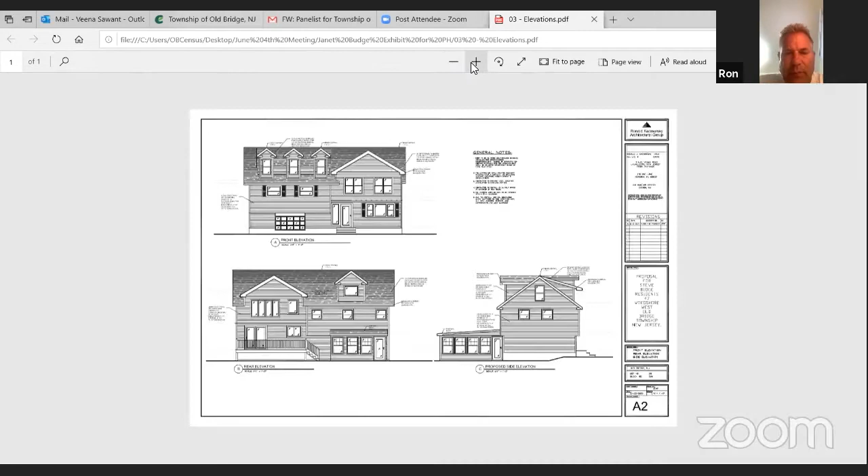Okay, so I see on my illustration, I'm seeing the plans. I don't understand exactly what was in question, and speaking to her in a limited way, I guess it's the attic area. There are two areas that are unfinished attic areas, and they are going to be for storage, listed as such on the plans in two distinct floor areas listed as storage. I believe that's what was in question. So if there are any questions related to that issue.

Okay, I think the planner did have some questions, because I believe there was some setbacks that were in question. And I think there was a question of the total square footage, either of the property or the house. I'm going to go to Mr. Warren.

So the real issue was that your plans had indicated that the space above the living area is also an attic. The zoning officer and myself determined that there is a height of 9 feet at the corner where the roof meets the wall, so there's enough headroom there. Typically, when it's an attic, it would be 5 feet or less. With 9 feet of room, and windows on it for that area, we would consider that an additional room, and it should be included in the floor area calculations.

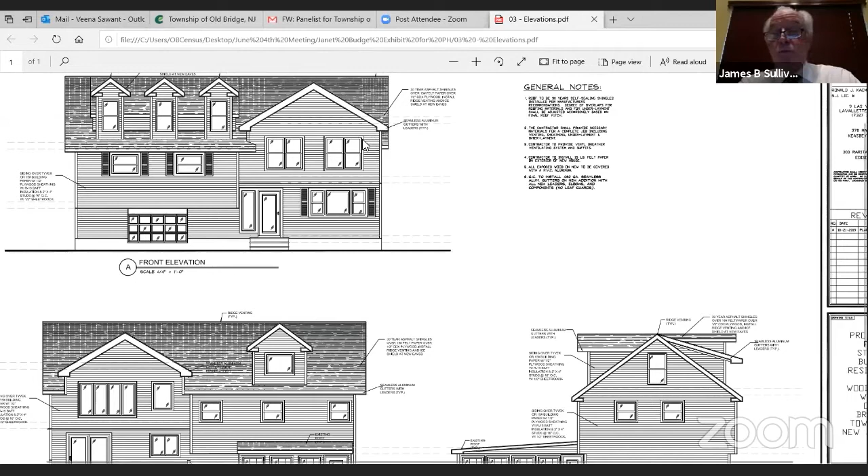Well, the real question is that if it was a storage area, it has windows, it has a headroom of 9 feet. And what happens is, yes, you probably may not use that space for living purposes and you use it for storage. But when you sell the house, how do we as the town monitor whether somebody is using that space as a room or not?

Well, this is Ron, the architect. If I can jump in, with the design of the addition and with the curb appeal in mind, creating that additional space and creating the dormers, having that large area without windows, without any roofline modifications, wouldn't be as appealing for the house.

But if I'm understanding what you're saying, it may make sense since it's there and we have the design with the roof lines and the windows, and we're before the board for that consideration of a small additional area. It may behoove the owner to request the variance for that square footage, understanding that they in the future may have the ability to utilize that space as living space, and certainly have the advantage of selling the house, realizing additional living square footage. Yeah, Mr. Kazmarski, I agree with you 100%.

Certainly, I think the property owner would want to maximize the usable space on this property. It would certainly make it more appealing for purposes of resale. So, Mrs. Budge, I think you probably don't want it to be a condition of approval that that area cannot be habitable, as long as we delineate that that one area will be habitable.

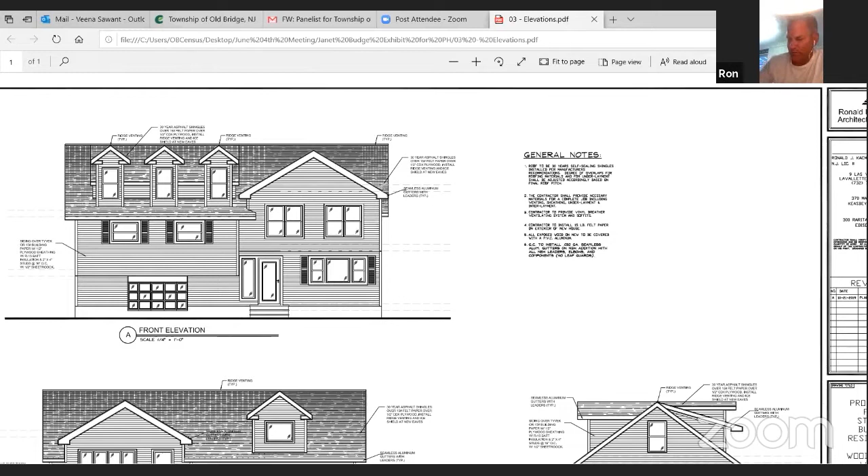Based on your offhand calculation—I'm sorry, do you know offhand what the FAR would be? It is 0.40. Yes, 0.40? Yep. Okay, fine, exactly.

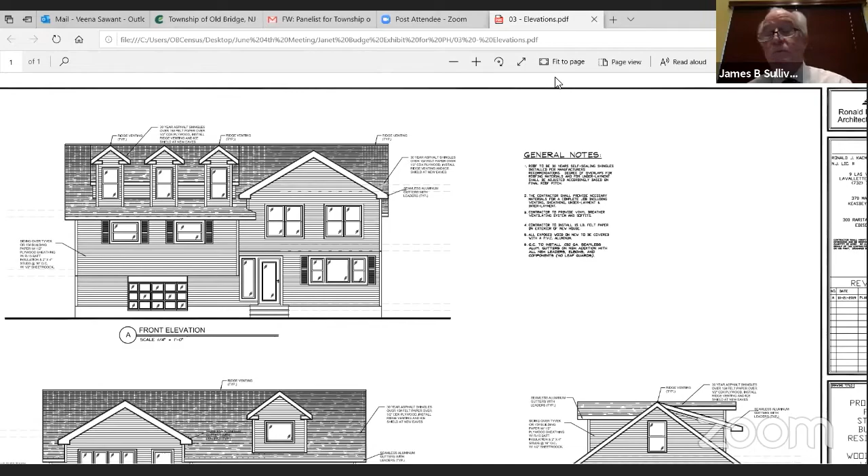Ms. Budge, I think these matters occasionally do come before the board, either from homeowner confusion or other intent, and they kind of come to seek forgiveness rather than ask permission. And in this case, this isn't your home, but I know it was your brother's and your sister-in-law's present home. Probably with a little bit of intentions, they wanted to expand room in there, but just didn't do it in the right way.

It probably would not be in your best interest, as you've been told by the professionals. If your sister-in-law wants to sell that house, no one's going to buy it knowing that you can't make it a livable space. I understand that having it available as living space would be more beneficial, but the board will make that decision whether to approve it or not. For you to lock yourself in and not get a fair shot, no one's going to buy that house. You've heard that from the board attorney as well, who doesn't have to give you that advice. I appreciate it, as well as from Ms. Salone.

Mr. Sachs asked if anything further was needed on the record. He noted a question in paragraph 4 about the height of the proposed structure, and asked Mr. Kazmarski to confirm. Kazmarski explained the overall height was not modified: the existing height was 26 feet, the proposed is 26 feet. Although the roof lines were modified to realize more space inside the roof line, the ridge remains consistent, so there's no height modification.

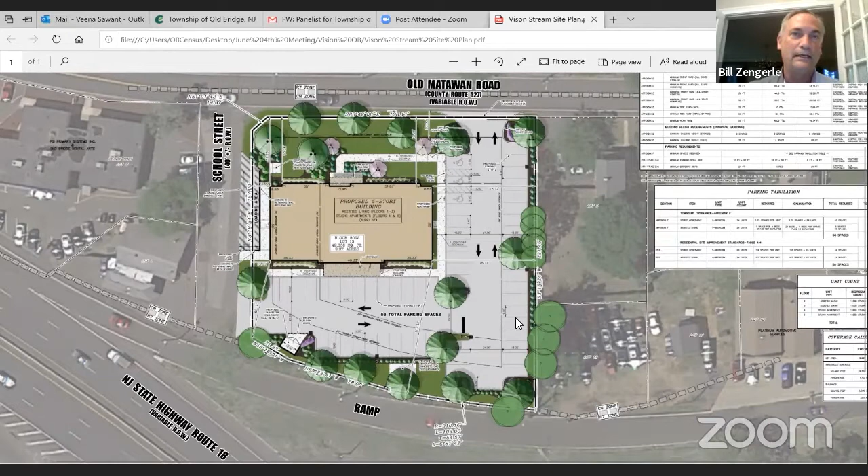The basics of how they differ in physical plant: one obvious difference, if you've been to visit a loved one or happen to have gone to a rehab facility for yourself, is that they look more institutional. They're set up for that type of care.

And you're usually sharing a room. An assisted living looks more like an upscale apartment community. The residents in an assisted living usually have their own apartment or suite. In our facility, we're talking all studios, and we had talked about the size of the studios before.

As far as the needs in the area, the Department of Health lists on their website all licensed facilities who are licensed under the Department of Health. In assisted living, there are, in the whole county, 11. Within Old Bridge, there's only one, attached to the Reformed Church. There are 4 nursing facilities in Old Bridge proper. In the county, there's 27 total nursing homes, and there are 11 assisted living facilities in the whole county.

That ranges all the way up to Edison, and they range in size from 42 beds to 156. So our proposal is certainly much smaller.

When you look at the demographics of the county, we have about 840,000 people in the total county. Old Bridge has about 65,000, and 11% are 70 years or older. That's 93,000 people in Middlesex County who are 70 or over. And when you go down to 60 or over, there's 124,000 people. We're looking to accommodate 50, so there's a little bit of room in there.

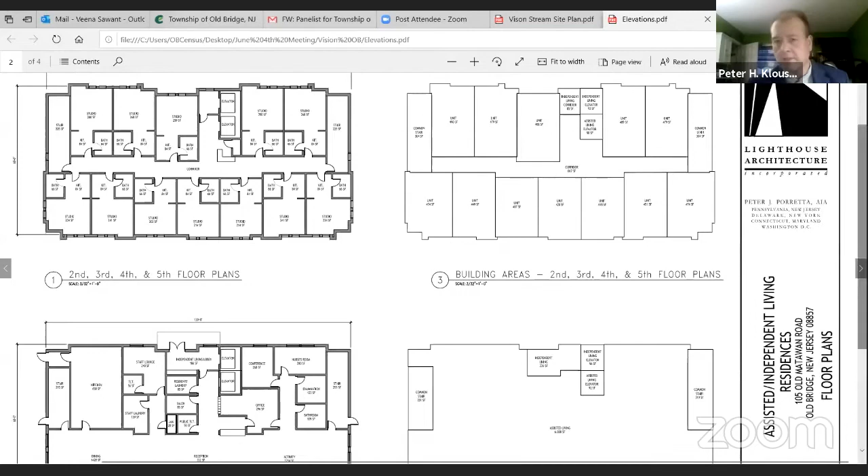But I did want you to share with the board a little bit about that. That ground floor is not a wide open space — there'll be some amenities in there, and it allows flexibility to create seating areas, eating areas, exercise, entertainment, and certainly the kitchen down there. So would you describe that a little bit like you've done for me?

Sure, if you could zoom in on the lower left a little bit — it has more of the, correct, right there, which has the office details also. If you look across the front, or the lowest part of the building, you have dining, reception, and activity. It's a free-flowing space, but the furniture arrangement basically outlines the usage of the space. We have a reception desk straight across from the front entrance, and behind that, straight down that short hallway, are the elevators up to the floors. The main area we're talking about is activity areas; the other areas are support areas.

Over on the right-hand side it says activity — in essence that's a living room, a large living room open to reception. The furniture layout will be such that during the day, for example, if we bring in an entertainer, the bottom right-hand corner will generally be a somewhat open area where a leader might be for exercises and things like that. Right by there will be a piano, useful throughout the day, since music plays a heavy part of our whole activity program, as well as couches, chairs, and tables, as you'd have in a hotel lobby.

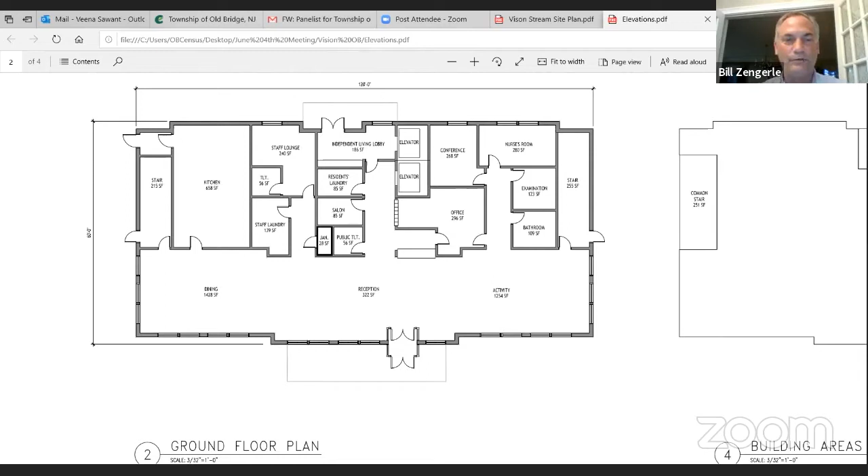Thank you, Bill. Thanks for that clarification. Mr. Chairman, I don't have any more questions for Bill. Our next witness is the architect, but if there are any questions that the board or your professionals have on those follow-ups, now's the time.

You're muted, Mr. Chair. Follow my own rules. I will ask the professionals. I'll start with Ms. Sawant, do you have any questions? I didn't hear her. I don't have any questions at this time.

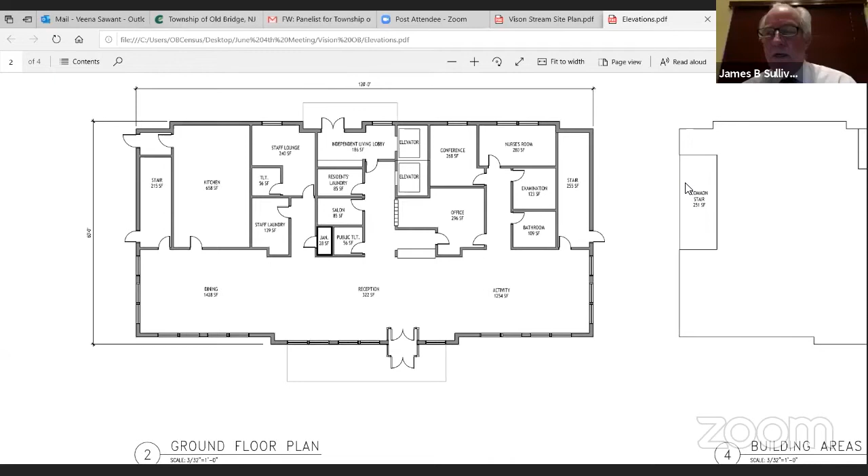Okay, is Ms. Shapiro on this? Yes, I don't have any questions at this time. Okay, and maybe just the fire marshal, you're here, right, Tom? Jim, I have no questions. Okay, how about the board members? Any of the board members have anything right now for Mr. Zengerle? I can't see them on the whole screen because I have the plan in front of me, but I'm assuming not. We can always save it for later.

Mr. Clauser, why don't you continue? Certainly. Thank you, Bill. I think you could mute yourself for the time being, and Peter, if you could join us. I would ask if maybe Mr. Porretta, the architect responsible for designing these plans, could be sworn, and we'll get his credentials on the record and hopefully get him accepted as a professional.

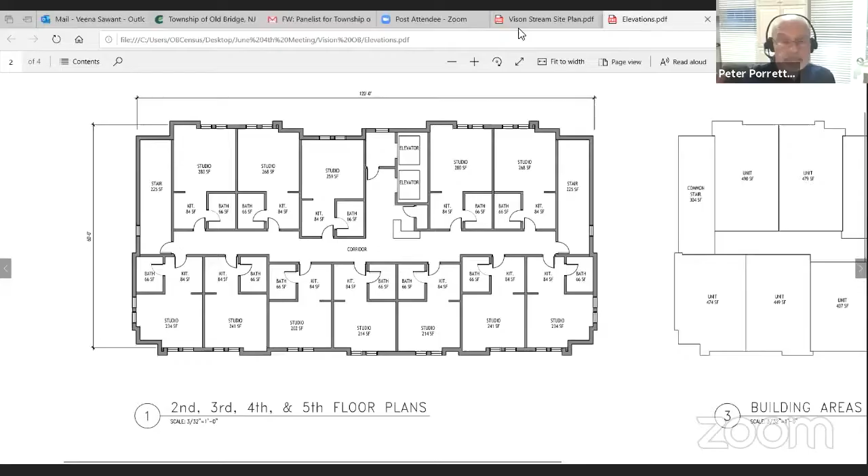Sure. Mr. Porretta, if you can please raise your right hand. Swear to tell the truth, the whole truth, nothing but the truth, so help you God. I do. Please state your name, spelling your last name, and professional affiliation for the record. Peter Porretta, P-O-R-R-E-T-T-A, licensed architect, state of New Jersey, as well as other states. Thank you, if you could just share with the board a little bit about your professional affiliation, that you've testified in front of other boards before.

Just want to give the board a sense of your qualifications. I've been practicing architecture for 31 years as a self-employed professional. I'm licensed in several states, all the mid-Atlantic states from Connecticut through Virginia, and the state of Florida. I reside in Atlantic County, New Jersey. My office is across the river in Philadelphia.

Mr. Porretta, you've testified before planning and zoning boards before, I'm sure. I have. Okay, we'll accept his expertise, Mr. Clauser. Thank you, Mr. Chair.

We have here the architectural plans that were submitted to the board as part of the application. I don't believe they've been altered in any way for the presentation, is that correct? Yes. So Larry, I don't know if we mark them or just leave them alone, since they're part of the submission. We don't have to mark them, it's part of the submission. Mr. Porretta, when you testify, just indicate what sheet you may be referring to in your testimony.

Okay, I could speak from whatever sheet or order you'd like me to. So whatever sheet you have up, in whatever order, I think we could finish with the rendering and walk through the functioning of the plans and the other 2D drawings, and finish with the color drawing if you'd like. Sure, I think that's an excellent plan. You want to take us through the floor plans first? Is that what you need to do? Sure. Okay.

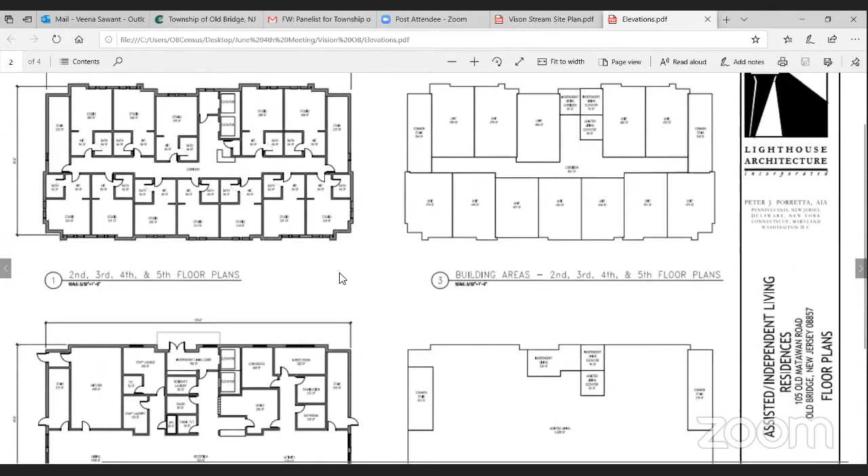Okay, you'd have to zoom in if you can. I'm not as young as I used to be. My eyes don't work as well as they did.

Okay, as you know, this is a 5-story building with a basement. The first 3 floors is a New Jersey Department of Health licensed facility, so we will have to submit to the New Jersey Department of Health and obtain their permission.

There's a stair on either end. There's elevators in the middle. One elevator is for the top 2 floors of the independent living, and the other elevator is for the lower 3 floors. Both elevators are planned to do 6 stops, all 5 floors plus the basement. They are located this way so that if one elevator is down, the whole building can share the other one, so they're not restricted to the stairs. However, in normal operation, one will be for the state licensed facility and the other will be for the independent living apartments.

The plan follows the program of the operator as well as the New Jersey Department of Health requirements for an assisted living facility. There are requirements for so many square feet per person for activity and living space, and so many for dining, as well as so many square feet per person for residents. There's requirements for nursing, examination, staff lounge, and the other spaces that you see here.

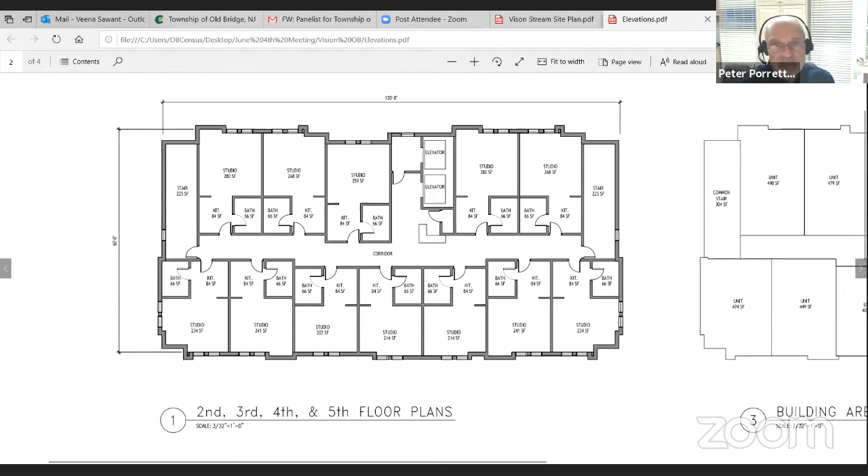Here's the elevations. The building will have on the lower 2 floors a brick veneer, the upper 3 floors a panelized rain screen with at this point 3 different materials selected to bring some variety into the facade. We do have some cantilever canopies at the 2 entrances.

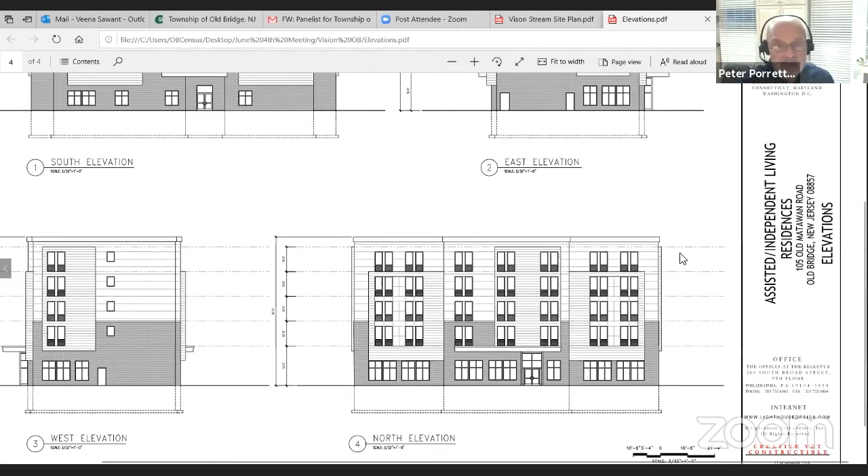You could see the adequate fenestration where there'll be bright daylight in the lower common areas, as well as each living room has a window, and they'll be set up like a hotel room with a mechanical unit under the window.

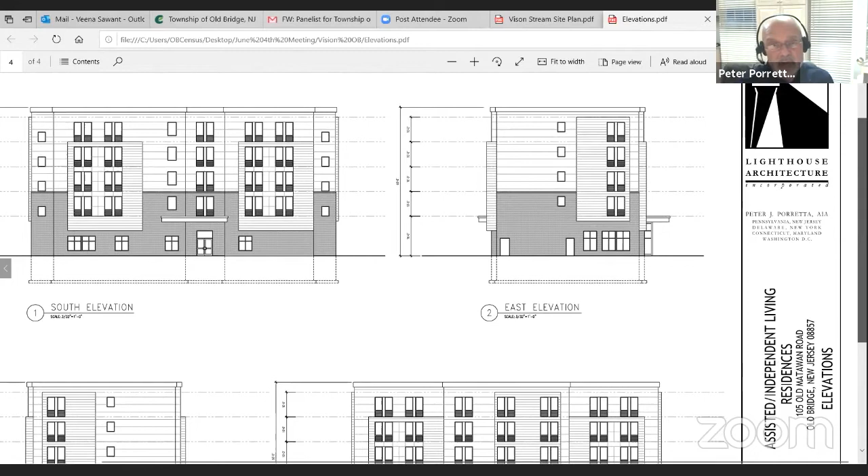And we have our floor to floor heights. I have consulted with a mechanical engineering firm who specializes in hotels so that we're making every effort to minimize the height of the facility, however provide adequate ceiling height in all the interior spaces. So we are cognizant of the overall building height and working judiciously to keep it as tight as possible.

That was actually a consideration - you worked with a mechanical engineer in order to get the space between each floor as small as it can be. That was a consideration. You were directed by the applicant to do that. That was something that you considered and you did.

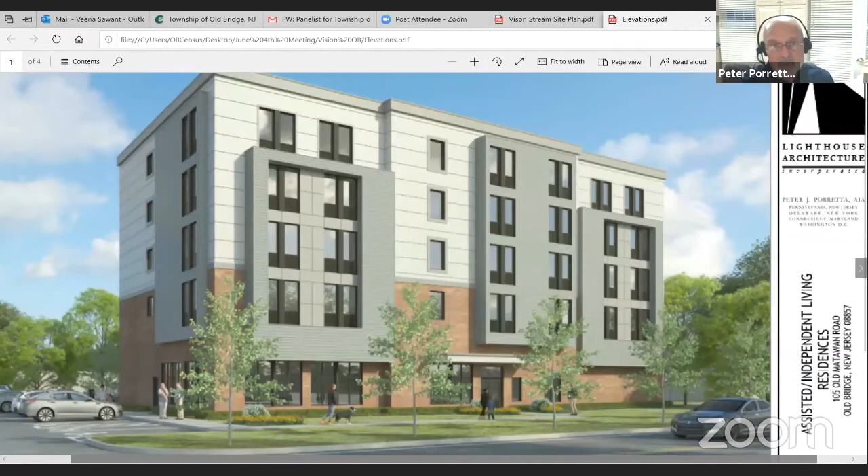And even the structural system that we're planning minimizes, utilizing a system that minimizes the floor deck height so that we can keep the building as low as possible. So structurally and mechanically, we are working to keep the building as low as possible.

Then you've also created this rendering here, providing some visual aspect of the design of the building to be attractive. And I would imagine that although in your opinion, as you designed it, it's attractive, you'd be welcome to any comments from the board's planner or engineer. I would think that you could work with the styles, the exterior, if they had some input.

Absolutely. Color is the first draft on color, first draft on materials. This will all evolve through the design process, as well as we added articulation and variety to the facade to make it as attractive as we can.

Thank you. Is there anything else that you'd cover that you want to add? I can't think of anything.

Okay, I just want to ask one question just to clarify. You've had the opportunity to work with Scott in the design of the building and certainly with the fire department, and we're able to make sure that there's a fire department connection and all of the appropriate safety measures are in place and are part of your design.

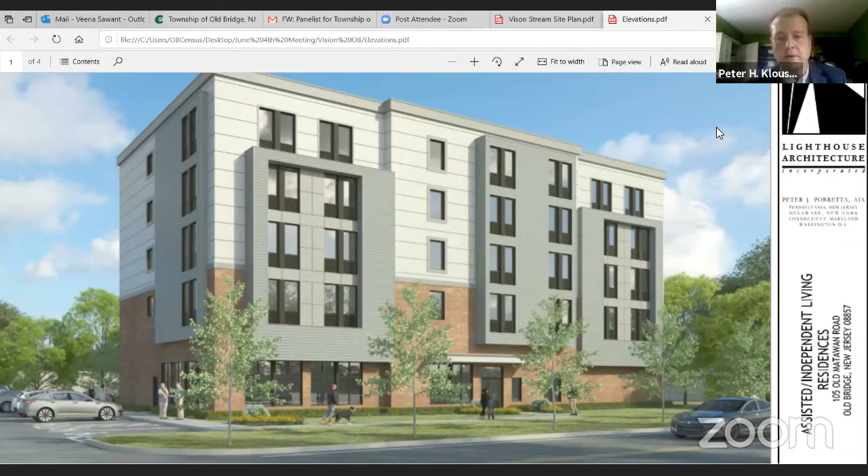Yeah, absolutely. So the lower 3 floors are, as I said, a New Jersey Department of Health licensed healthcare facility, and the upper 2 floors are independent living. We did work with the engineer's office to locate fire department connections and all of the utilities to the building, generators, because there will be a generator for the assisted living facility. It's a requirement. All of those things we worked through with the civil engineering firm.

Great, thank you Mr. Chairman. I have no further questions of Mr. Porretta. He's available to your professionals and the board for any questions you may have.

Muted again, Mr. Chair. There we go. People don't want to hear me talk anyway, Peter. It's the only time I get to tell you something. Yes, thank you, it's fine. Keep muting yourself. Well, you caught me on that one twice now.

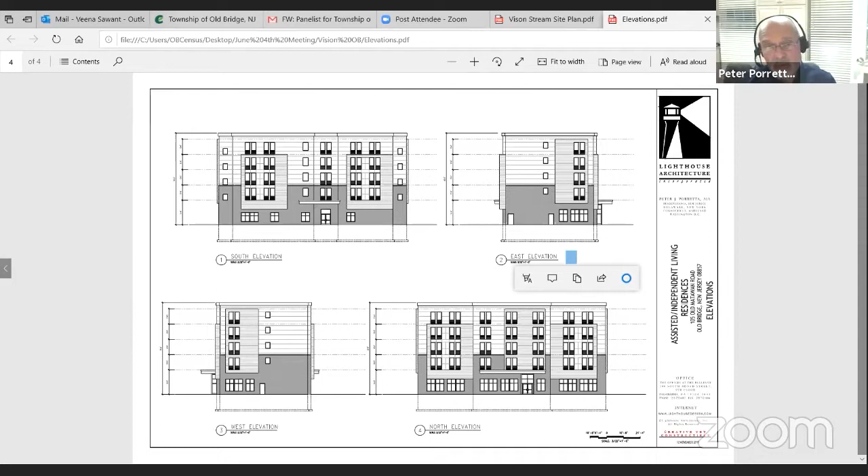My comment was more about the equipment being in the yard, because we've had issues in the past. I just wanted to ensure none of the equipment would be within the yard area. I believe we have space for a generator, which is required, and that would be in the yard, but other than that I don't anticipate any equipment in the yard. Do you know the approximate location? I don't recollect seeing it on the site plan.

Veena, I'm making a note with regard to the equipment. I think we could probably provide some better detail next time and just clean that up. Sure.

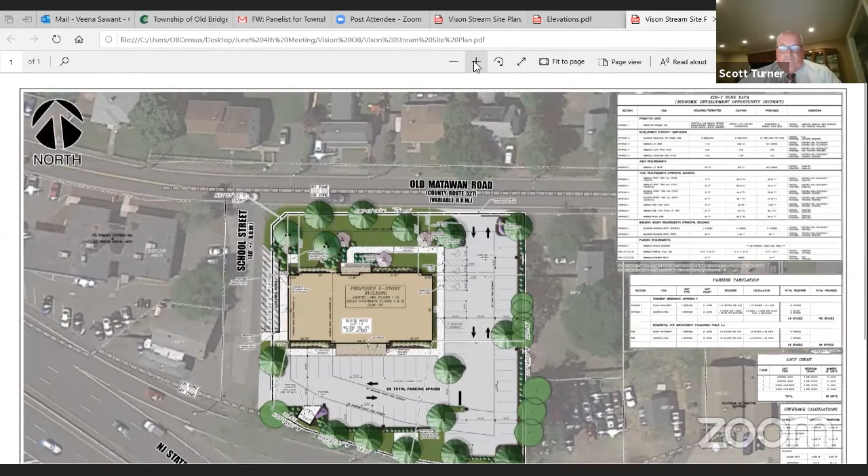Okay, that's understood. Can it be worked out to use bigger than the minimum? I believe the OSHA minimum is 42 inches for fall protection or a railing. We would have to add a rail if we didn't have a 42-inch parapet, yes.

Okay, I just don't want you to go any deeper than that. All right, not a problem. Thank you very much. Thanks, Jim. Thank you, Fire Marshal.

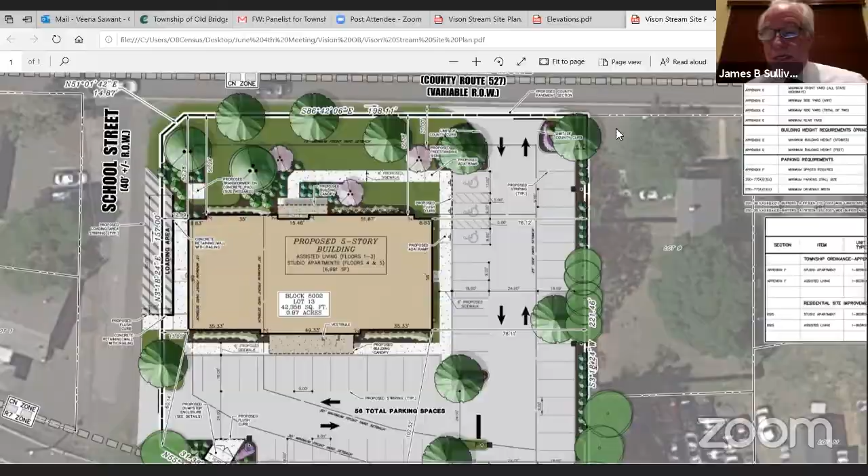I have one question before I ask the rest of the board members. I heard you say something about the two entrances on the ground floor plan, and they're easily distinguishable, one in the rear and one in the front. But I think it's important for those watching at home, and one of the questions was, if you recall, that people were concerned with the independent living residents on the top two floors mixing with, at that time there was no suggestion of an age restriction, that they might be just mixing in a common area. Could you explain that a little bit better for those watching at home?

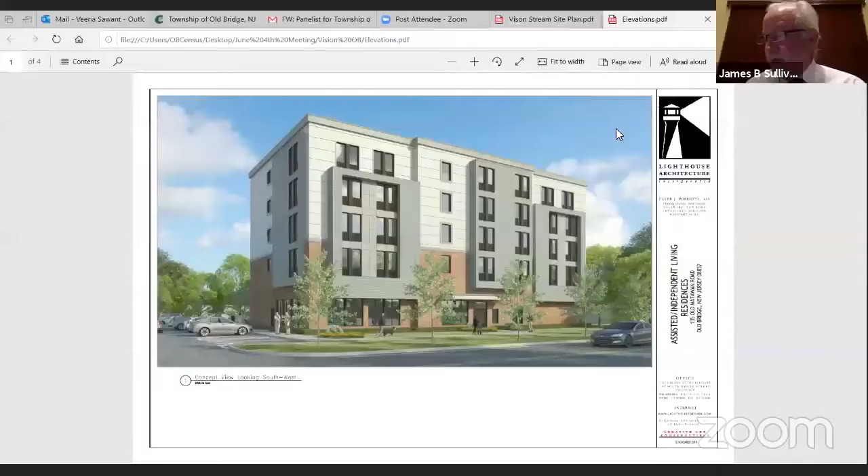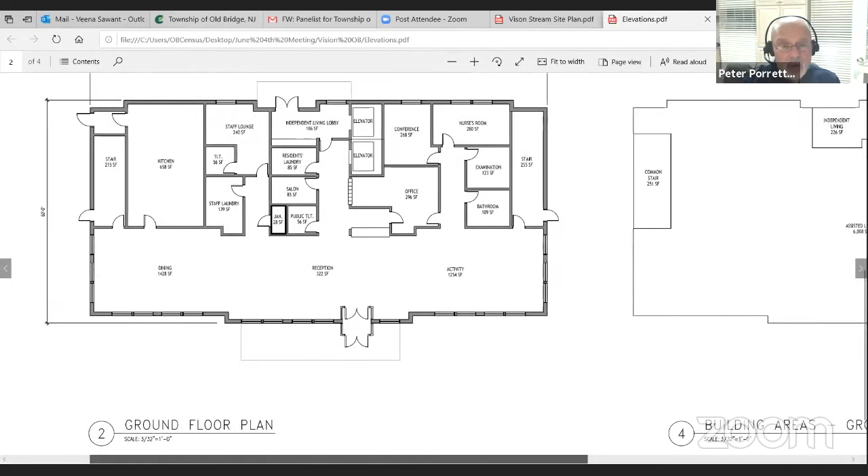If you can go to the floor plan, I could zero in on the lower level floor plan. Yeah, maybe you could take the time so people at home would understand this. Understood, happy to do so. Please zero in on that ground floor plan, make it large enough so that we can all see it. So on the lower part of the plan is the entry vestibule with the canopy. Would you put a cursor on that for those at home? Thank you.

The entry vestibule at the lower end, yes, that is the assisted living entrance. And directly across from that, you'll see a counter—that would be the receptionist for the assisted living, with a door to the office. Now, in the upper part of the plan, you'll see a lobby with a smaller canopy. That is the entrance for the independent living. There'll be mailboxes—you could see the mailboxes on the wall right there—and then the entrance to the elevator. So you can come in, grab your mail, enter the elevator.

Now there is a door between the two that obviously will be locked. If and when one of the elevators is serviced and it's down, building management could make the other elevator available, so no one is locked on a floor without access to an elevator. But through the day-to-day operation, that door will be closed and locked, and the independent living will be completely segregated from the assisted living. This is also looked at by DOH, the New Jersey Department of Health—their architect will look at this arrangement as well.

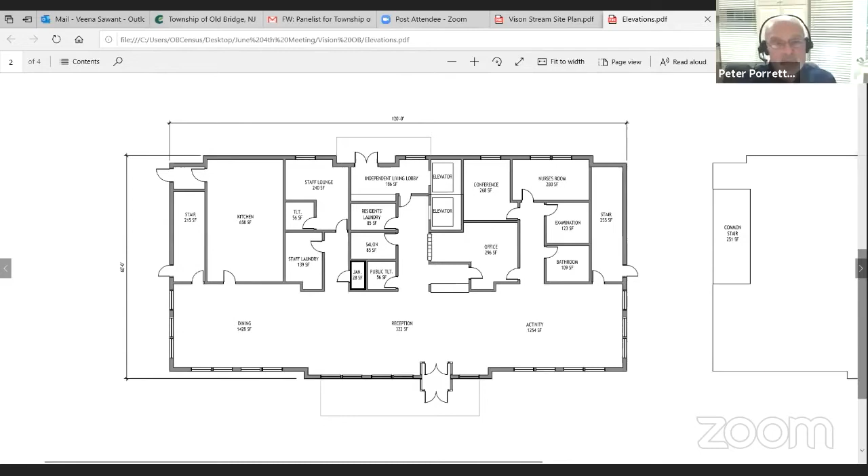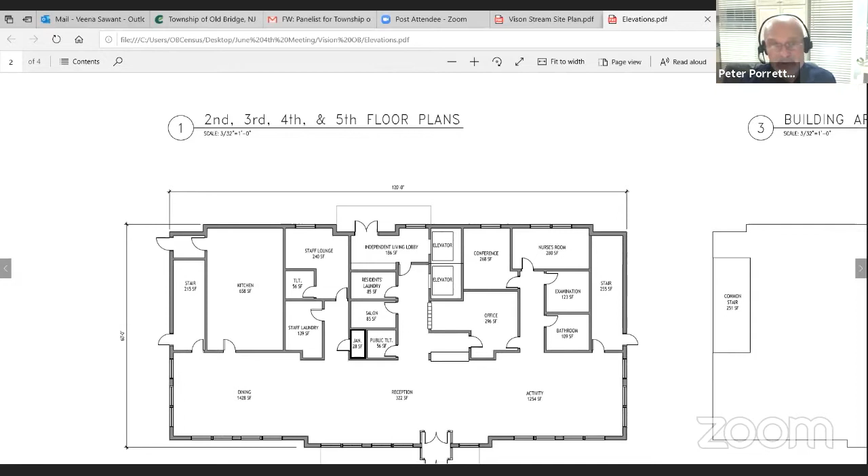Okay, and sir, just for the commenter's explanation, are you saying that no one could come in the back door if you lived upstairs and just walk into the communal area on the first floor? Absolutely, they cannot. And the only time they'd be able to access another elevator is if the other one was out, correct? If one of the elevators is out, building management would have to supervise that while it's being serviced, so that no one is stuck on a floor, because there are walkers and wheelchairs in this facility and they need elevator access—stairs aren't an option for some people. So we are cognizant of that, but the New Jersey Department of Health's architect will be very judicious about this arrangement. Okay, how does it work for the stairwells?

You'll enter on the floor and every door will be unlocked so that you can enter the stairwell to egress. However, once in the stairwell, the only door that you can exit is the outside.

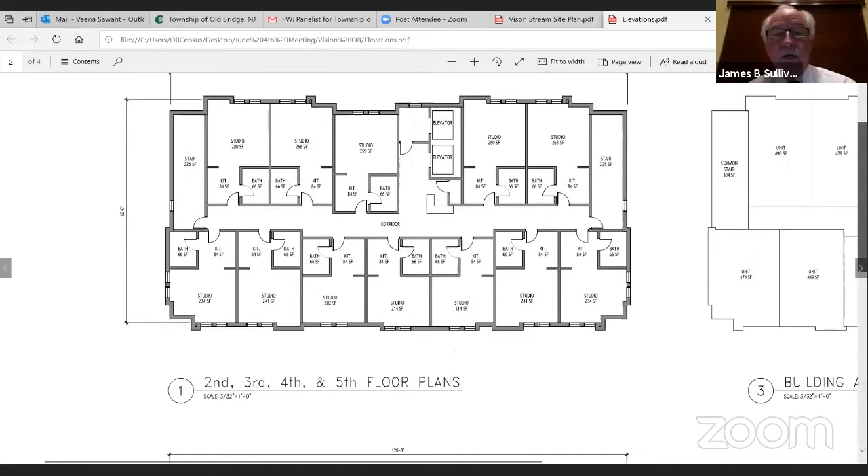Okay, all right, thank you very much. Board members, I can't see your faces right now because the plan is up, but if anyone would like to question Mr. Parada, I'd like to do so now, starting from Leon's end of the dais.

Mr. Scogno says no. Ms. Kilduff, I just have one question. The old building, does anyone know how many floors that old building was before the fire? I don't know if you want me to answer, I think Veena has the background in her report. I believe it was approved for 3 floors.

And Mr. Hart made a comment, I don't know if he wants to make it again, that there was a very high roof or something that appeared as though it was higher. Tom, I don't know if I'm putting words in your mouth, but that was notes I remember. Yes, you're not, Peter. The building before the fire was 3 stories with a big mansard roof, which made it almost 4 stories tall. When the fire happened, it took the roof and the 3rd floor, and left you what you see now as 2 stories flat, but there was almost 2 more stories above it.

Thank you, Tom. What would that be, in the 40-foot range? Yeah, give or take a couple of feet, yes.

Okay, the old schoolhouse, I remember it, I went to school there. It was not very tall each level, stair towers were very short. So I would say you'd probably fare with 40. Okay, thank you, Tom, thank you.

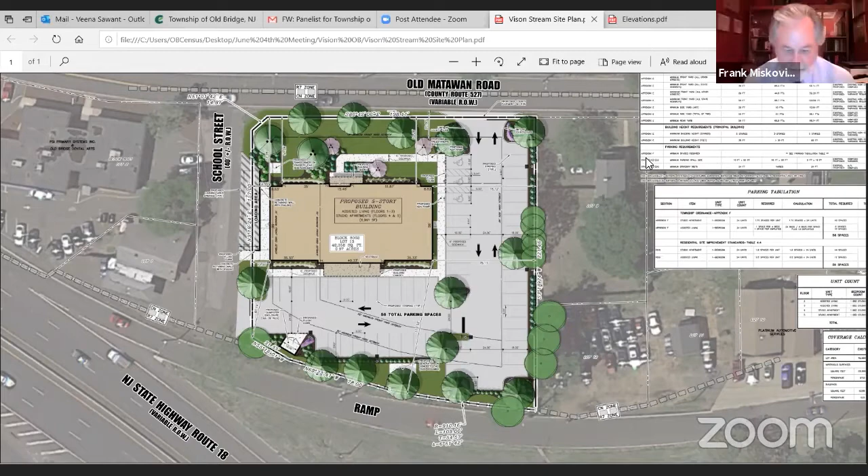What I did, to be conservative on the parking, I looked at all those variables and took the highest parking demand of any of those. In other words, if the number of occupied spaces had a higher parking demand compared to bedrooms, I used the higher number. Going through that, I found we would have peak demand on the assisted living at 32 spaces on a weekday, a little bit lower on Saturday and Sunday. For the residential, peak demand would be 36 spaces weekday, 39 on Saturday and Sunday.

But we've been looking at the supply side, and that's the demand side. I think what's important in this facility is that it's mixed use. The township requirements, the RSIS requirement, is supply oriented. It doesn't look at variations, time of day or day of the week, etc.

For example, the assisted living is going to have peak times during weekday hours, 11 a.m. to 6 p.m., where the residential has peaks later in the evenings, 11 p.m. to 7 a.m. in the morning, which is standard. So the peaks are not occurring at the same time.

I went back through and did a shared parking analysis following procedures outlined by the Institute of Transportation Engineers and the Urban Land Institute, where I looked at these variations and peak demand throughout the course of the day.

Applying these factors using the ITE peak demand, the spaces are approximately 80% occupied at peak times, 11 a.m. to 6 p.m. weekday, that's the maximum. Saturday, down to about 70% max occupied. Sunday, about 76% occupied. So we have enough parking looking at these peak periods and the operation of two facilities. But I went one step further.